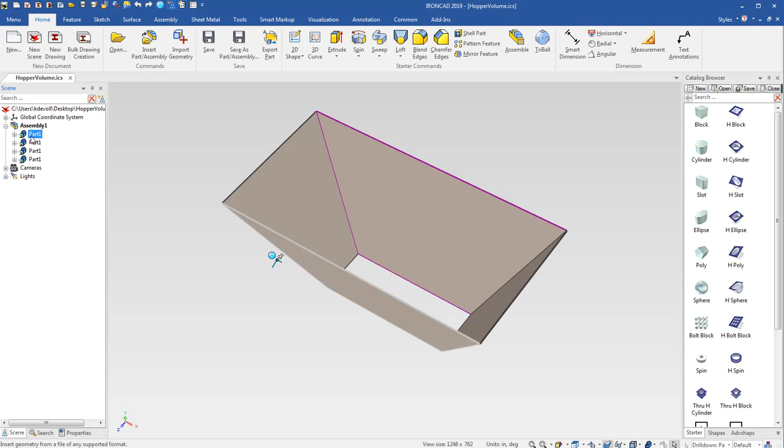Hello, this video is going to show how to accomplish a nice little challenge that came across my desk recently. A user wanted to know what the volume was that would fill this hopper here. And you can see from the assembly tree here we got just 4 plates that are welded together. And he wanted to know what the volume was if that was filled.

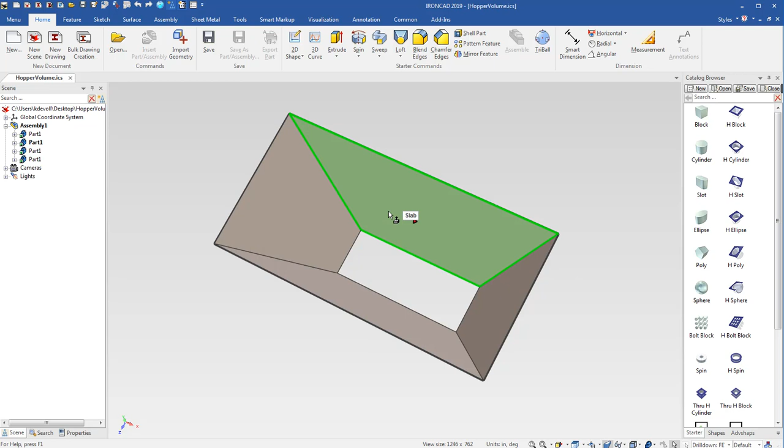Now, we could just make a loft between the two, but if it was a more complicated shape, there's some tricks you can do to pull the geometry off here. So I'm going to just show how to do that. So I'm going to start by selecting some faces. So I'm going to go down here to the green face selection, and then I'm going to hold the shift key down and select the 4 faces there. And then I'm going to right click on one of them and go down to create and then extract surface.

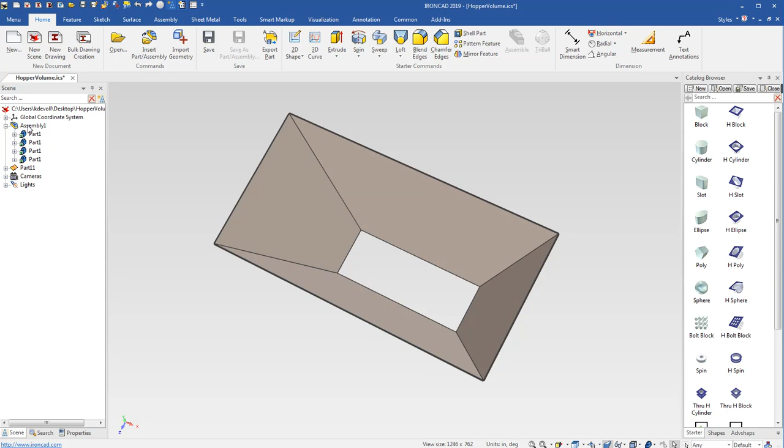And it's going to say they're from multiple parts. Do you want to stitch them into one surface part? And I'm going to say yes to that. And you can see then I got my one surface part. And I'm going to right click and just go ahead and suppress my assembly. So you can see I've got my part here. I can reverse the orientation so the outside is showing to the outside. But then I just need to fill in the top and the bottom.

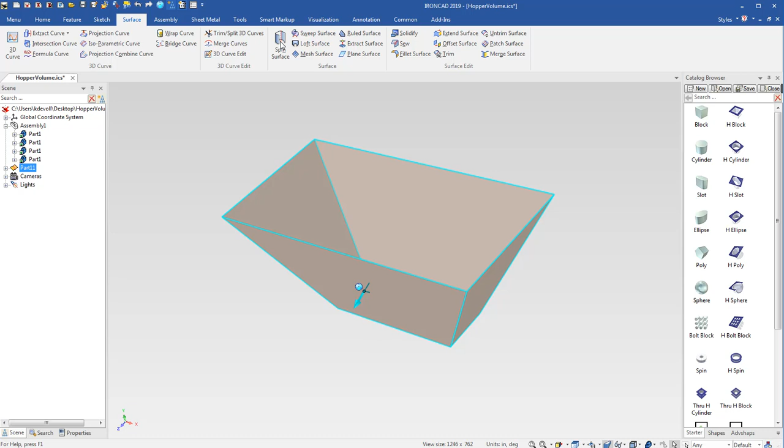So I can come up here to surface, and I can just use a simple ruled surface to pick the 2 edges. And then I want to add as an IntelliShape to that part so it becomes a feature of that part. And then you can see I've added a ruled surface to the top. And then I can do the same thing on the bottom. I can just quickly add a ruled surface there. And again, I want to add it to the part. So you can see I got a part there.

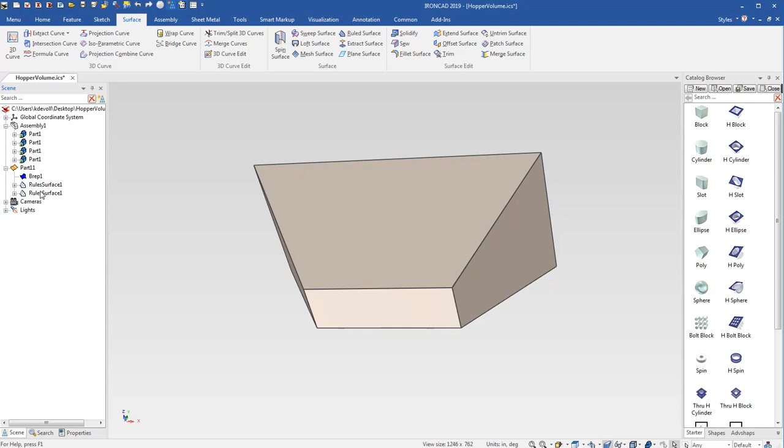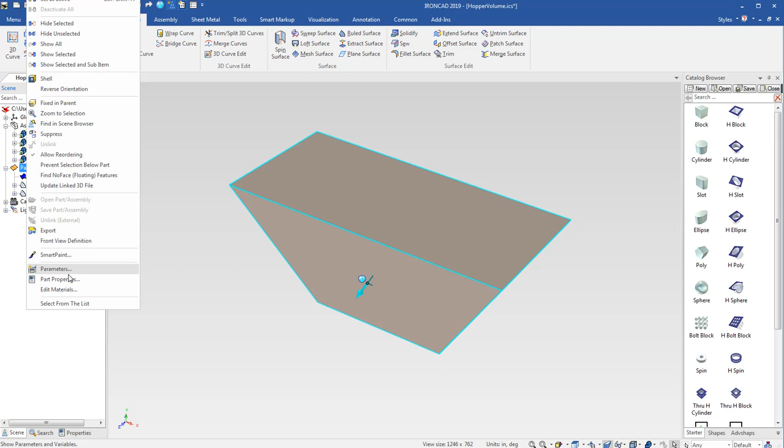And it didn't solidify. It's still showing the surface shape. So I won't be able to get the volume, and the volume is what I want. So I'm going to come up here to solidify, and then just hit OK. And it says it failed to do solidify, so that's okay. So sometimes in IronCAD things don't work right in one kernel, so we can switch them to the other kernel. So we'll switch it over to ACIS, and then we'll try the solidify. And it did it. So then we have a solid part.

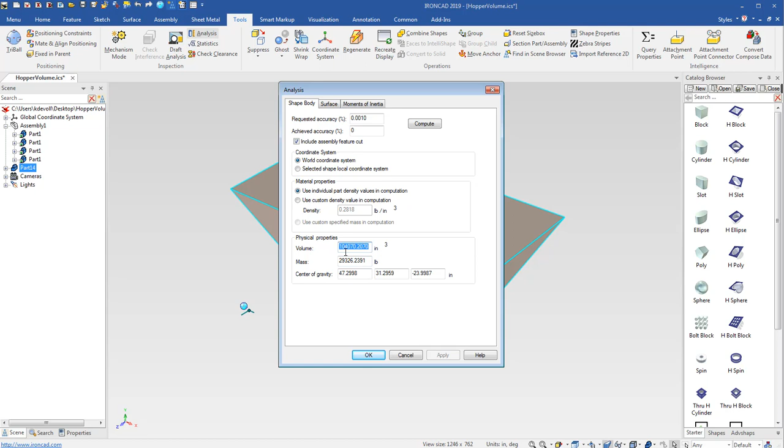Now we have the solid part that is the volume of the inside of our hopper. So then we just come up here to Tools, and then go to Analysis and Compute. And you can see we got our volume there. We got quite a bit of volume. It's a large hopper, but anyway. And then the weight of the material, if you put a density in there of the material that's in there. But this is your volume here that you wanted, and that's just a quick and easy way to get that.

So extracting the surfaces there is a way to pull off any complicated part or assembly and turn it into a single part. So hope you enjoyed that.